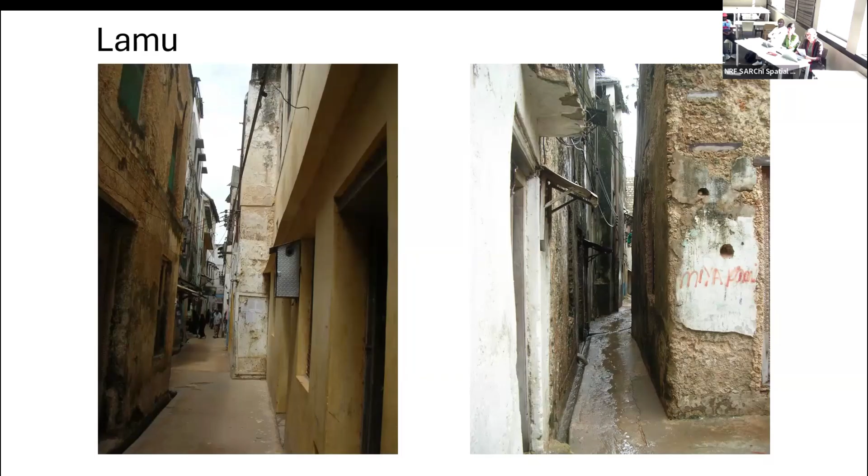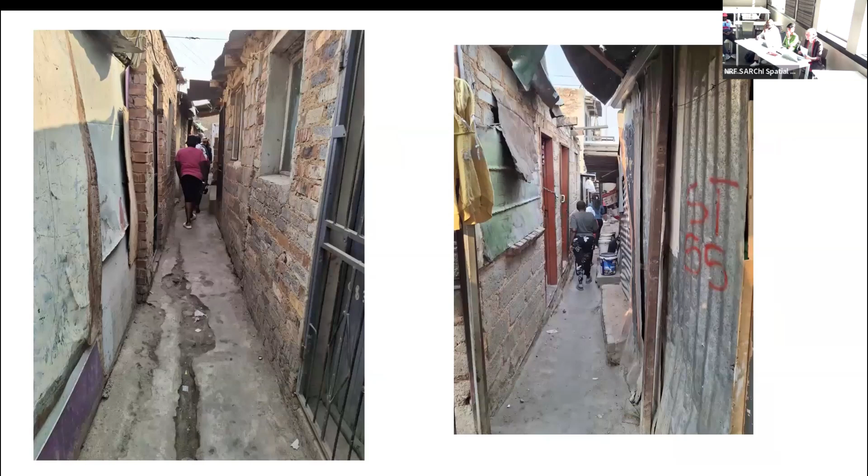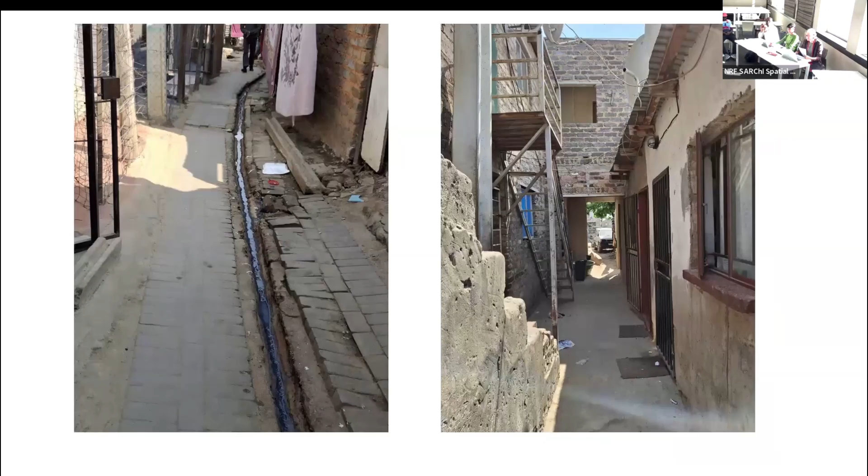Turning back to Stjwetla, I'm showing a few images of the very narrow alleyways, which to varying extent have little water gullies in them. Mostly they are paved. There have been localized ways of dealing with stormwater, which is in fact the topic of one of our master's students this year. These alleyways exist in other parts of Stjwetla too, and in the aerial photograph you'd have seen these very dense, large swathes of Stjwetla with passageways like this.

The built-up fabric of Stjwetla is very dense, but it's also diverse—there is precarious housing in Stjwetla, although it's also inhabited by people who are not just surviving, who have a modest income and invest quite innovatively in the very little space they manage to secure. Stjwetla is not socioeconomically segregated internally, but nevertheless the more marginalized people occupy the more marginal land—you'd find exactly the same pattern in a favela in Brazil, where people who arrived more recently are the more precarious ones, having to occupy steep slopes, or in Stjwetla, the areas more likely to be flooded.

But different parts of Stjwetla also evolved out of different city-making processes.

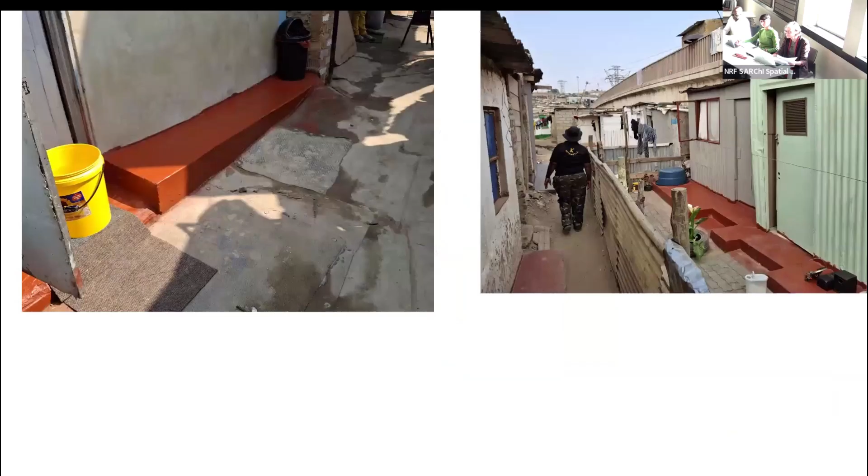There's a politeness that goes with navigating these spaces. Here we have from Lamu a feature which is a bench built onto the side of a house, and it also becomes a feature internally, in the in-between spaces between public and private. This is a feature we see very extensively across Stjwetla, almost a unifying feature across the different typologies of housing and city making.

Tin houses or corrugated iron houses would have them in front. The unifying feature is also the red polished paint sold at the market - a lot of effort gets put into keeping these little stoops beautifully polished, and they're used for a diversity of purposes.

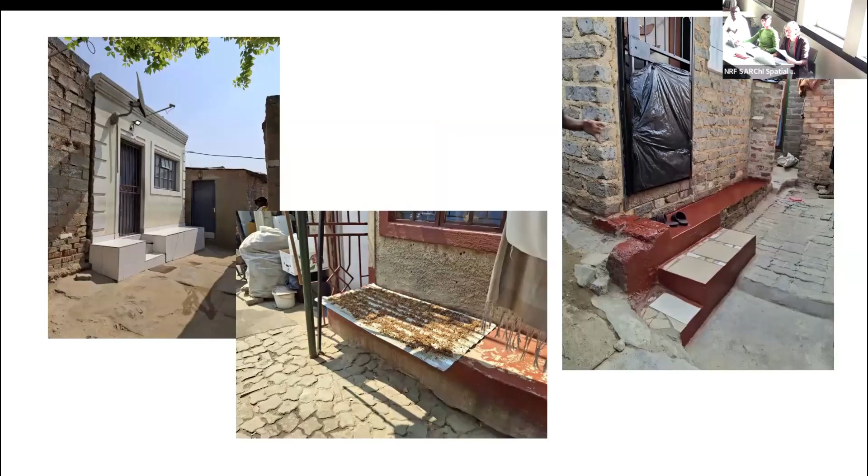There's one tiled in front of a very beautiful little house, and on the right-hand side a more precarious one, but that's where the shoes get left when you step inside, or in one case below, a sort of traditional herb being dried. Often one sees washing tubs standing on these stoops as well. They define a semi-private space.

In the temporary location area in Stjwetla, people have also appropriated these concrete structures in front of their houses and used the same color, and it becomes really a unifying feature across the entire settlement.

I'll move on to mentioning different parts of Stjwetla. Masengeni in the south is a response to infrastructure that was laid out - in fact it was electricity. There's no other infrastructure other than electricity, laid in a grid system with long straight blocks and temporary shelters, very small dimension one-room temporary shelters.

That was the pattern according to which people were allocated units, which has since transformed. There are some internal bathrooms and sewers that have been built, and others are still using the communal chemical toilets that are rolled up along the main road, and collected water.

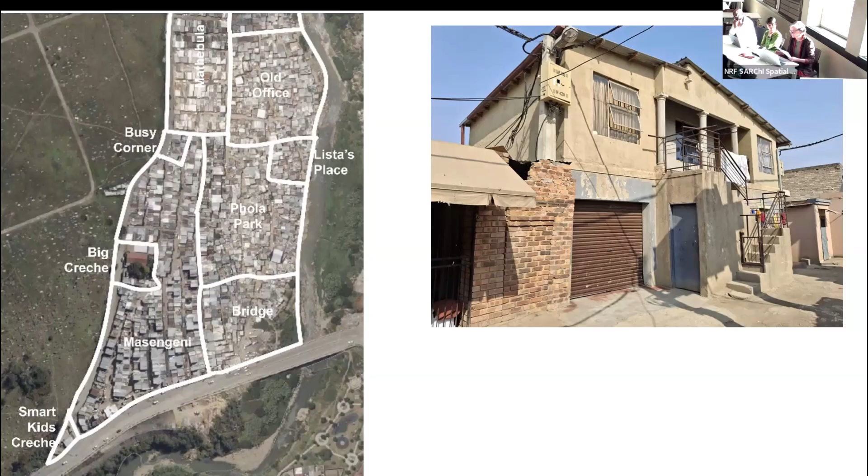So with that, I'd like to head over to Nomonde, whose research we'll hear about, which has really been building on the housing approach that's inherent in these areas. So thanks, Quentin.

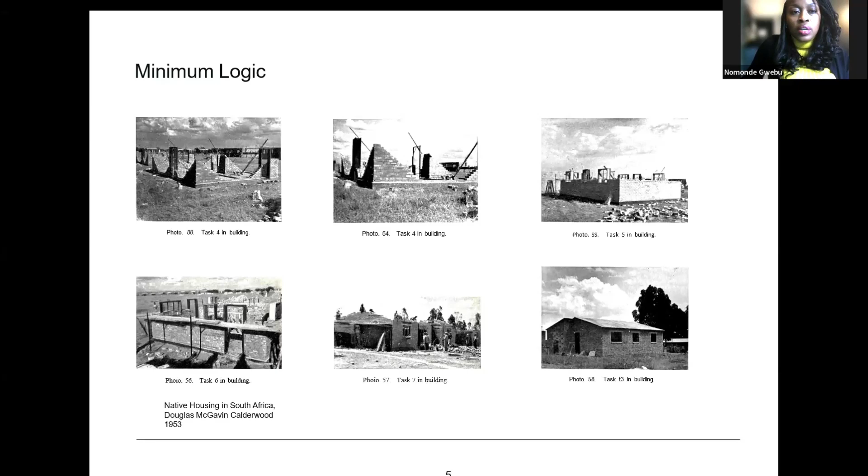On this minimum logic: the architectural design atelier methodology was actually used in 1953 by architect Douglas McGavin Calderwood, to produce what was then called the model native house.

Interestingly, the same design that was then called the model native house is what later became the RDP house, and later was renamed the BNG house, although these were under different policy eras.

So Calderwood's thesis proposed the first comprehensively documented and widely implemented low-cost housing model in South Africa. That's why it is, in a sense, the beginning of this research.

Having presented this background, the research problem can be clearly articulated: while the urban and building designs of low-cost housing remained constant throughout different policy eras, the examples photographed here, the aspirations in the policies that produced these designs actually had changing, and at some moments contradictory, aims.

For example, the apartheid government was looking to contain and control a workforce with this design. The RDP house was looking to house a newly liberated population of South Africans in dignity, but used the same design to do so. Then in the BNG policy era, the insights one can glean from a design point of view were about correcting some of the shortcomings of the RDP.

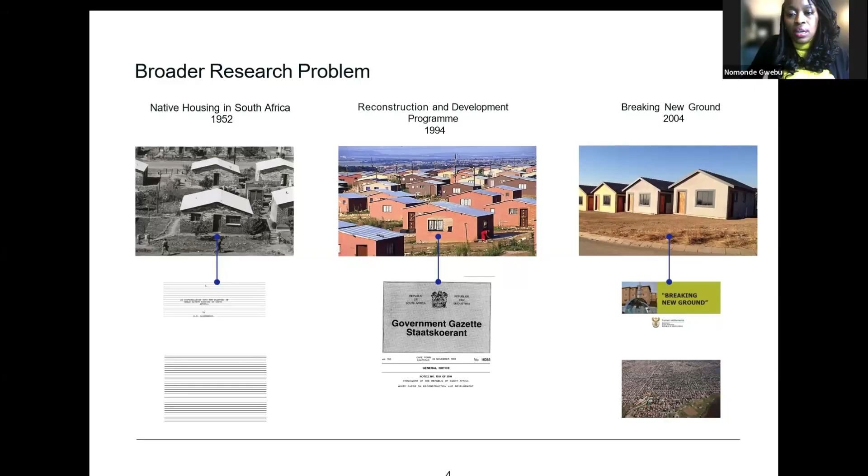So while the policies had totally different objectives, the design that was expressed as a result of those policies saw very little change. And that is the problem of the research.

The question springing out of that problem, simplified for this presentation, is why is it that the apartheid era housing models either persisted or new housing programs produced units that were inferior to earlier native housing models? In other words, how can we substantiate a design trajectory that achieves its aims and transcends the minimum logic?

I approach the question through 4 sections: the background, which is a book chapter focused on the research question, framing a background that looks at what is the influence of the 1950s model native house on contemporary low-cost housing.

Then the first case study, atelier number 1, was in Eastern Johannesburg, not in the city studio area, so I won't present that in detail.

But the second atelier case study is in Stjwetla, Evolving Architecture, Architectural Design Research towards evolving the temporary housing typology into permanent dwellings in Stjwetla.

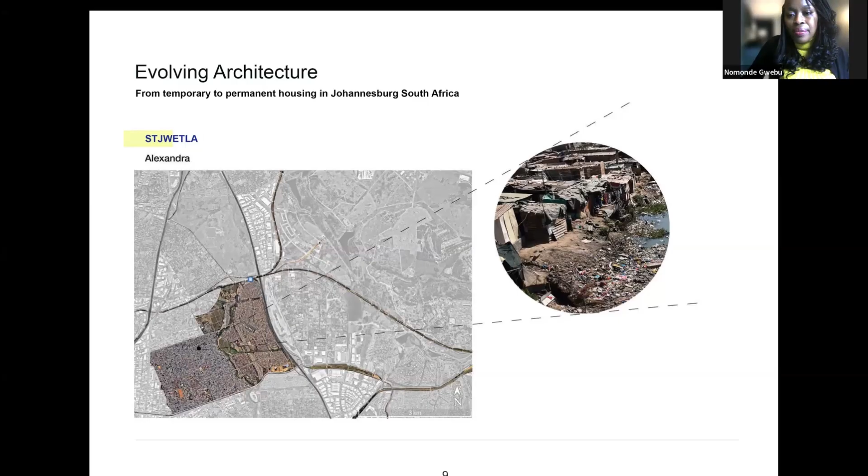This is a typical self-built home, zinc sheeting and plastic on top are materials we see in this kind of self-made typology. And then, rather controversially, there's a relatively new temporary housing typology being implemented by the government in very similar material, also zinc sheeting, materially very similar to the self-built models.

Just to give you an idea of the scale, during 2022-2023 the Housing Development Agency awarded 4 separate tenders for the delivery of 1,256 units. So it's picking up during the period of this research, which was up to 2024, it was picking up quite steadily in its implementation.

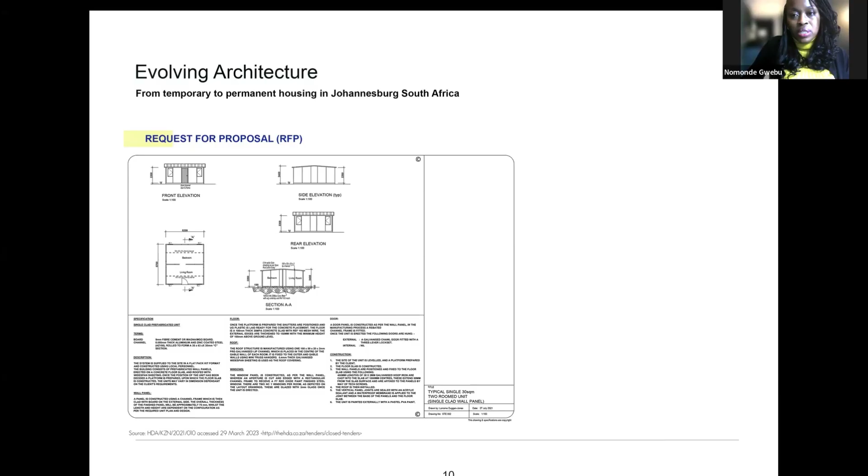I mentioned this temporary housing category because the state has delivered temporary housing in this case study to a community in Stjwetla where homes were actually burned down. That's commonly when temporary housing is delivered.

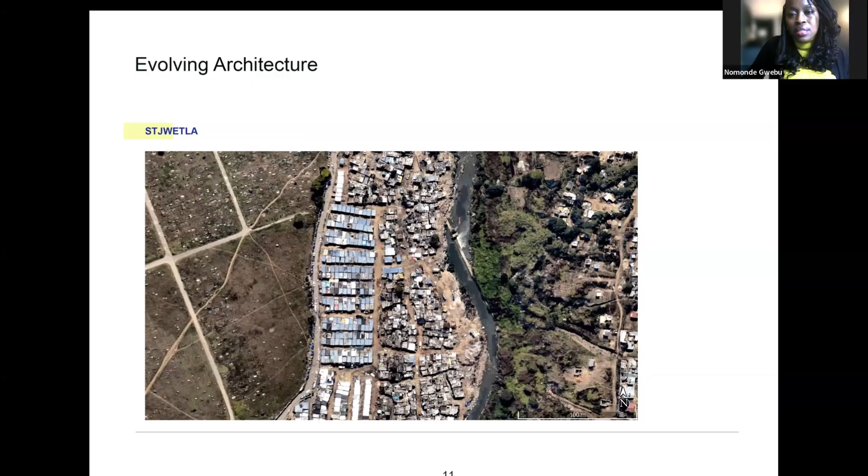This is the study area for this particular research. Another view of what was delivered. The units are back to back. This is the street formation that Marie presented. There are toilets here which are shared between the community on the right and the cemetery on the left.

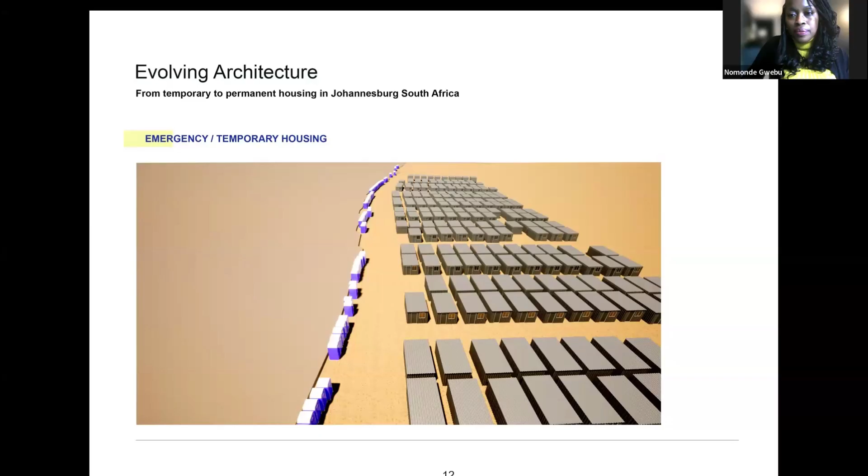This is a section through the site which reveals, in diagrammatic form, an elevation of what is delivered.

These images trace a path of how people upgrade their own dwellings. Starting on the left, the plinth that Marie presented from an architectural point of view, the waterproofing of the ground floor plane is something that's not done in the way the temporary units are delivered. They're just placed on top. So the first renovation tends to be fixing that.

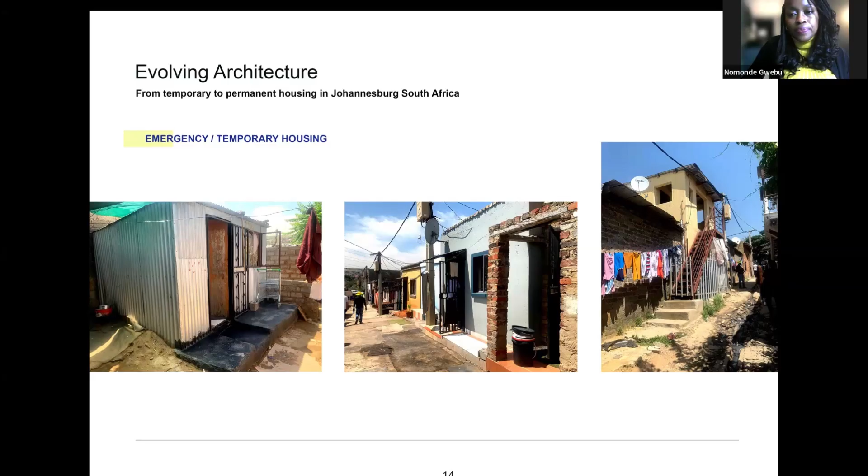Then the middle image shows further upgrades, the painting that's been spoken about before. People really beautify and take pride in their homes. The furthest renovations typically go on the right, the double story. So the research took quite a lot of time to document the typical order of things as people save up and are able to do more and more to the dwellings.

Local construction workers often salvage materials from other projects, restore them, clean them, and then resell them to this market, and then they become affordable for people to actually implement these kinds of upgrades.

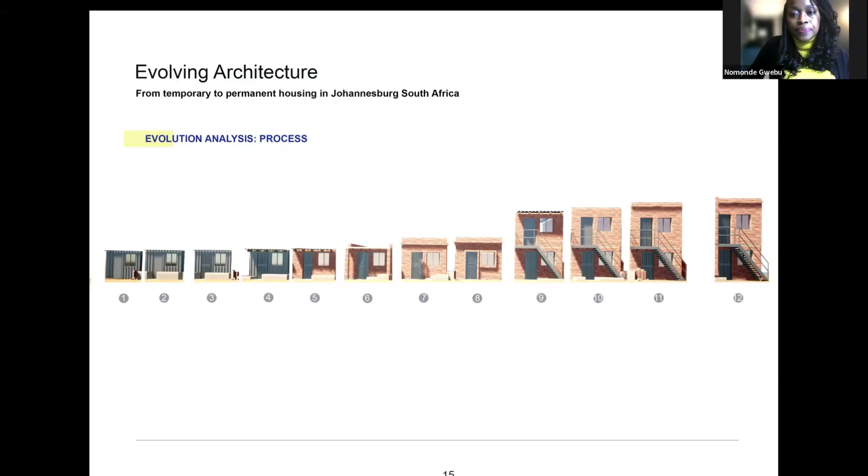And then as we saw also, but maybe in a bit more detail, this is a typical street where the various houses are in different stages of developing.

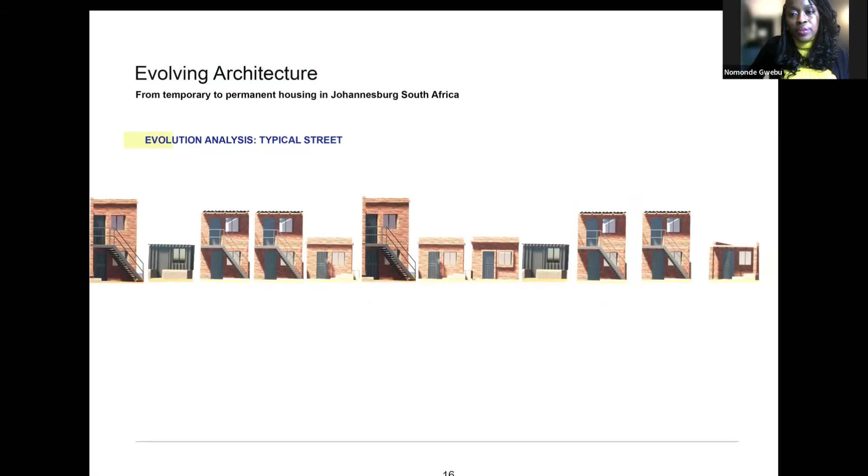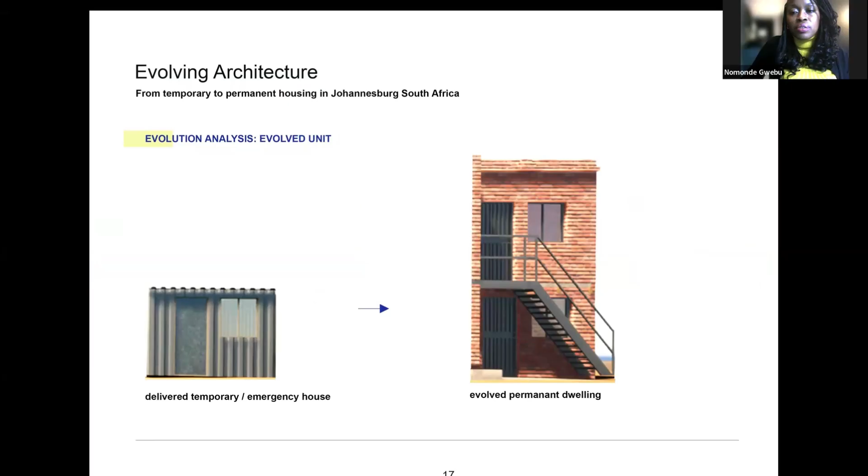Delivering a temporary house that must be demolished to make way for a long-term structure is unsustainable and impractical. So the research proposes that rather than delivering a temporary house, what could be delivered could be a portion of a permanent house that would create more of an affordance for the kinds of dwellings that we know tend to come a few stages later.

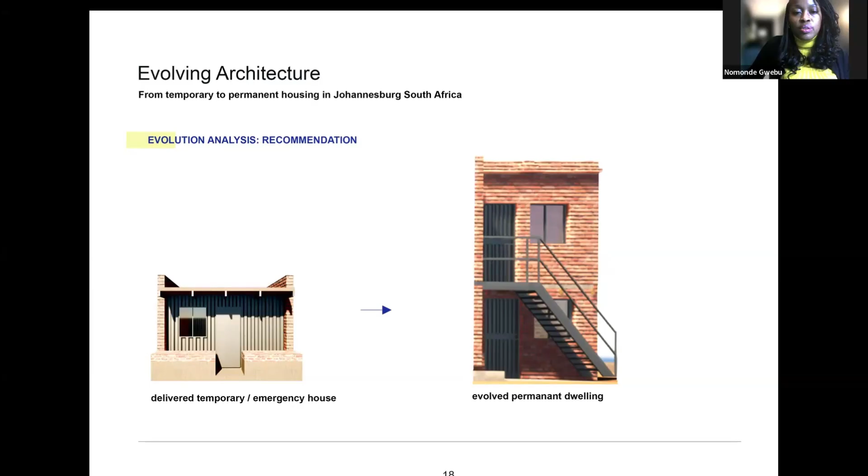The second and last case study we'll be looking at here is on the vacant, lucrative land between Stjwetla and Sandton. Sandton is one of South Africa's most expensive places, and that kind of tension isn't really an exception anymore. It's a reality we're having to deal with more and more—this idea of urban infill between contexts that have totally different social fabrics and income levels.

So this atelier draws on 37 existing low-cost housing proposals developed for case studies throughout South Africa to propose a design for this greenfield site. The case study aims to locate similarities in approaches to low-cost housing in a set of national examples in order to propose a design that would then be theoretically widely applicable.

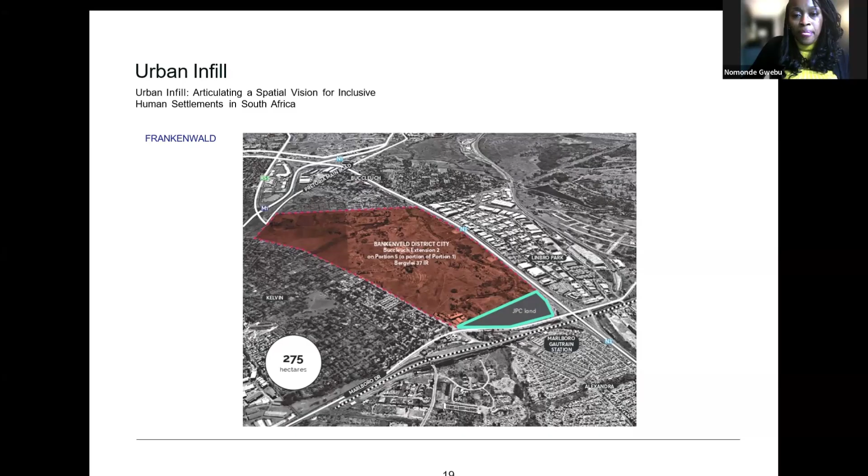So the site considered in this case study is outlined in blue. If we look at the next slide, there's a company working on developing the much larger piece of land—a developer that typically implements middle class and upper middle class dwellings. From the forms we see here, those are the sorts of dwellings they seem to be building. They claim to have thought about low costs to an extent, but the forms don't really show much variety.

So this research assumes that a middle income development is on its way, and then looks at this lower piece of land owned by the state as an opportunity for an infill project between these extremes of underdevelopment and the very developed suburbs we're beginning to see.

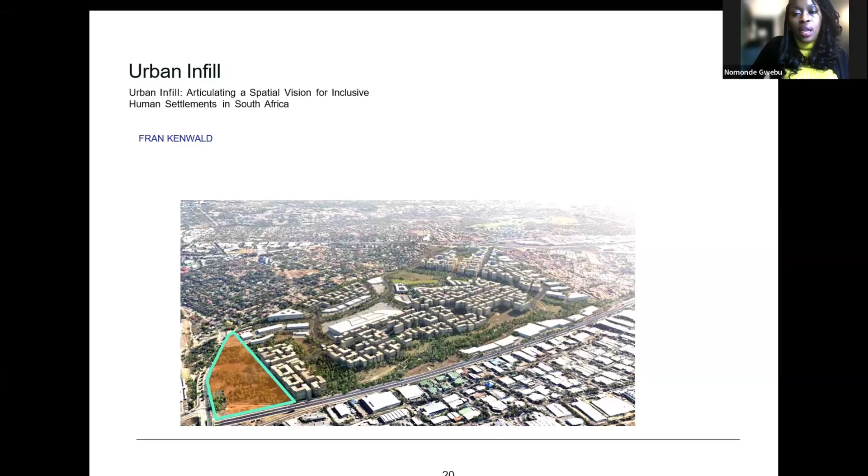So all of the Master of Architecture theses generated between 2000 and 2024 were obtained by this research and tabulated as you see here. Hamdi's model that I presented earlier was used to locate these approaches on a spectrum between approaching housing as infrastructure and approaching housing incrementally, based on what these designers recommended for the context they studied in detail.

For example, in the second column you have UCT, where there were 6 housing-as-infrastructure proposals, 1 incremental house design proposal, and 7 proposals that combined housing as infrastructure and incremental in the same project. Drawings were done to understand the essence of each proposal and make their insights accessible as design strategies to implement on the vacant site.

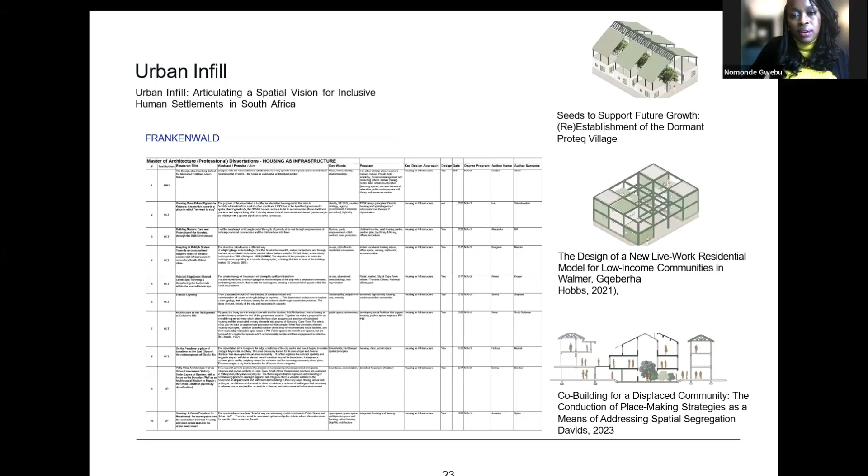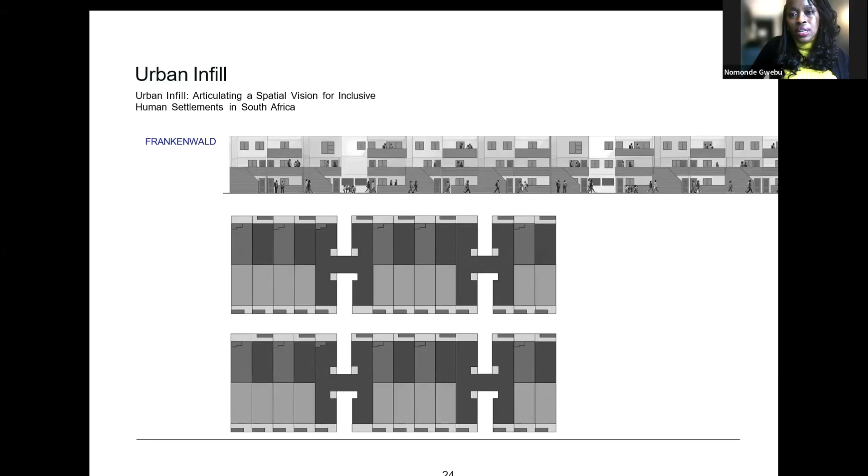From all of these studies, this kind of design emerged. There's a rhythm here of private dwellings and businesses. The streets we see in Stjwetla start to emerge in this design, and we see echoes of the character Marie was describing about Stjwetla, but designed in a way that's a little less precarious, perhaps. So variety is attained through creating a fixed palette of design resolutions that owners can still select from.

Sure, okay, time is really not on my side.

I will go to the design principles then. So the design principles that were derived from this research that I've presented, a few other examples, and a couple of other findings from the literature review revealed these principles. Whether the approach was predominantly infrastructural or predominantly incremental, these four principles were still visible in most of the recommendations and even in the proposals that the research produced.

And that is visual rhythm modularity. There are brief explanations under each one, which I don't think we have time for, but the visual monotony that results from implementing identical structures arises from the practical need that mass producers must embed efficiency through repetition in their construction processes. While the conceptual approach of building communities through totally incremental, individually designed homes finds appeal with activists and community outsiders, community members tend to value the structural reliability of formally developed infrastructure housing projects. And then to account for the counter imperative for repetition and variety, the research finds potential in a rhythmed modularity, and then visual and functional variety, the variety and the function just being expressed in the design.

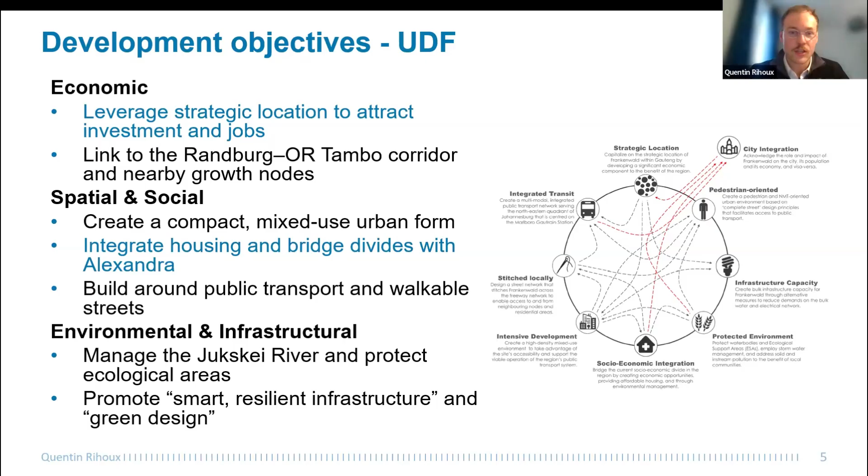The project wants to capitalize on its location. It sits right between key corridors, and planners see it really as a future business and residential node that could attract investments and jobs. But it also speaks to bridging the socioeconomic divides between the affluent northern suburbs and the nearby Alexandra Township, which means combining a large portion of bonded and commercial housing aimed at maximizing the surplus value with a small share of state-subsidized housing to reduce the risks and remain in the agenda of de-densifying Alex, the original agenda. So how was this translated into the plan?

Basically through an iterative process of translating broad development objectives into programmatic goals, and then giving these programmatic goals a form on the abstract space of the plan. It starts from a perimeter following the property boundary drawn on the map.

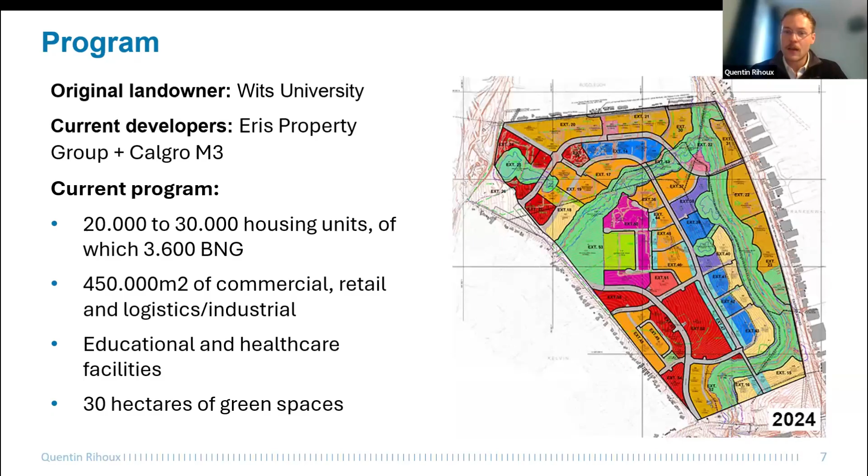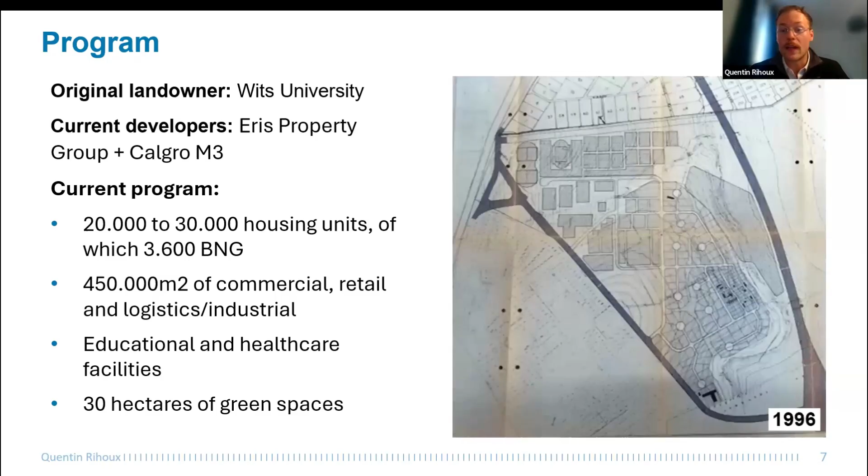Onto this base, planners layer physical and legal constraints, then sketch a street network, and the remaining land is divided into programmatic units, then into blocks where different typologies are tested. Through this process, one can extrapolate surface areas by land use, which in turn translate into potential real estate or rental income for developers and for Wits University.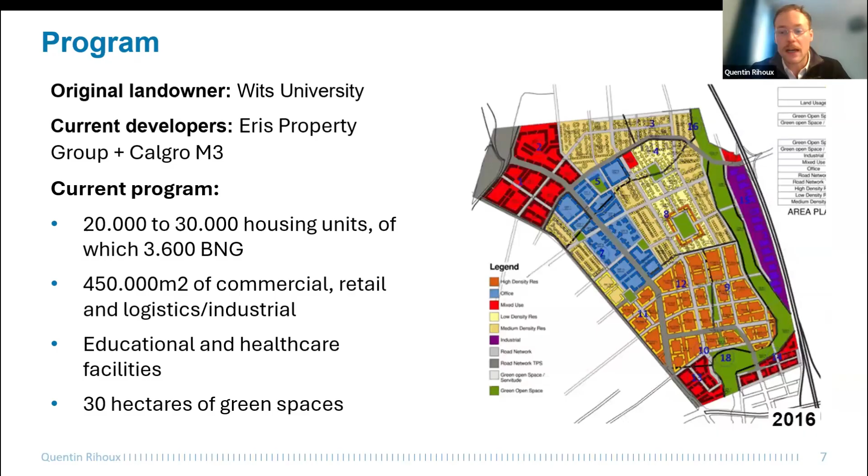Throughout the project, negotiations and power relations between the different actors continuously reshaped these objectives, programs, and plans, forcing the design process to look back and recalculate.

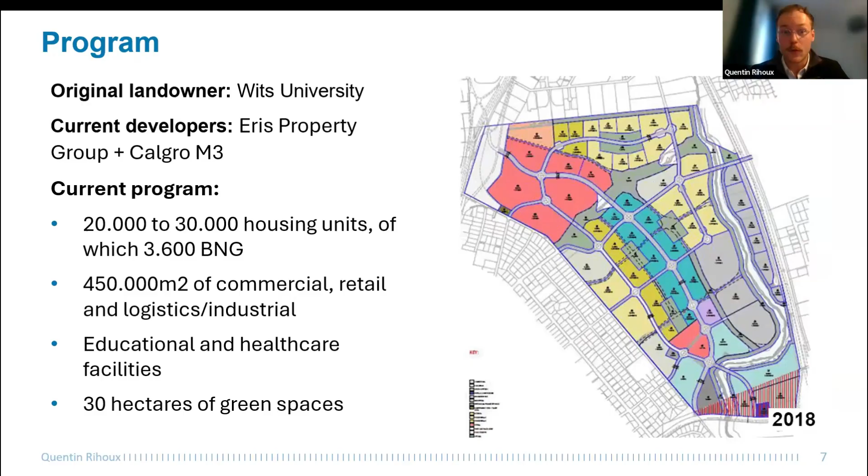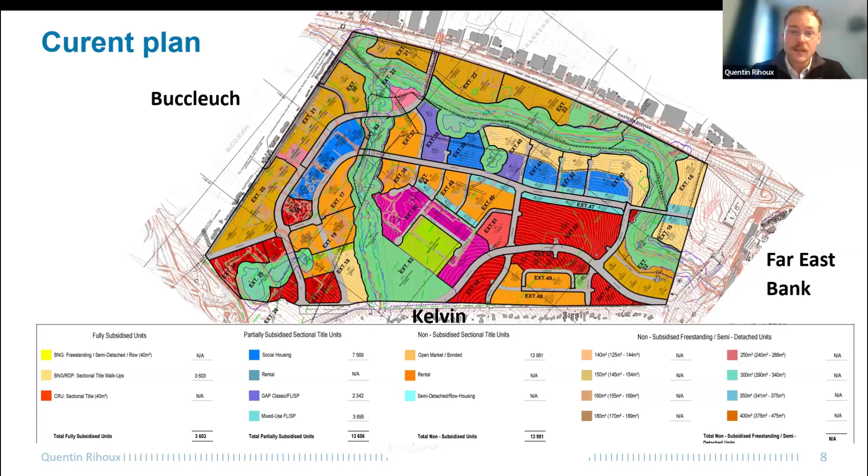Here is how these programs are now distributed on the plan. The first thing you see is a large green area around the Jukskei River. Then industrial activities in brown facing the highway and the community of Buccleuch.

Two commercial and offices hubs in red. A high line connecting the Gautrain station towards the center of the development, and a large compound of schools in magenta next to the large green areas.

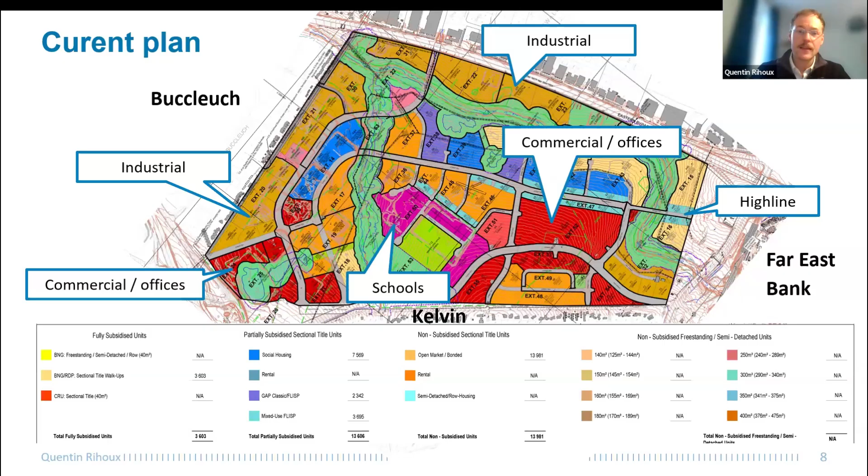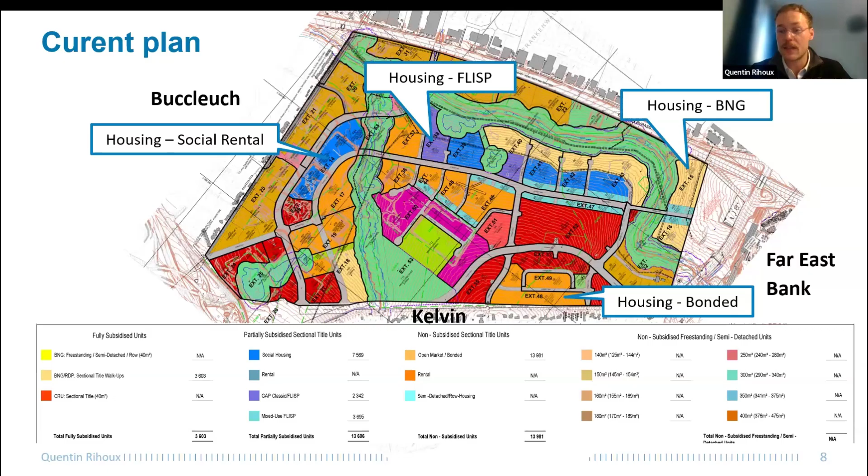In terms of housing, most of the area is dedicated to 13,000 open market bonded units in orange. In shades of blue, another 13,000 units are either social rental or FLISP, meaning bonded but at a controlled price. And finally, in beige, closer to the Far East Bank, closer to Alex and the Jukskei River, the 3,600 fully subsidized BNG units.

The idea of phase one, which has kicked off this year, is to start next to Buccleuch with industrial, commercial, and offices areas, as well as some bonded and social rental housing, because starting there requires less upfront investment in terms of infrastructure.

The intention was also to start with some BNG units near Alexandra. But this is now being delayed because the city, who owns the piece of land that Nomonde talked about next to Marlborough Drive, is delayed with their own development process.

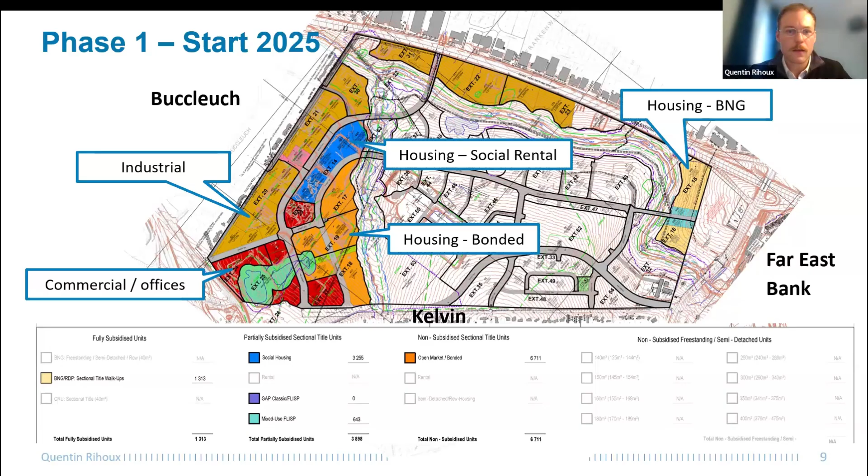To finish more concretely with the spaces this will result in, I further zoom on the plots. First to say that the chosen programs, the profitability requirement and the constraints of the site result in a very high housing density on the plots dedicated to housing, with most of the housing between 8 to 12 stories, with only one exception.

Here, facing Kelvin, a community who managed to negotiate lower density for bonded housing to protect their property value. Here you'll notice that the state subsidized housing is set to 8 stories, which is quite different to the norm, but also to what Nomonde showed.

This is due obviously to the high density needed to produce sufficient profit margins, but also due to a deal with Kelvin and Buccleuch community against what is considered not proper, meaning site-and-service and other forms of incremental and auto construction, which allow impoverished Black people to build as they want.

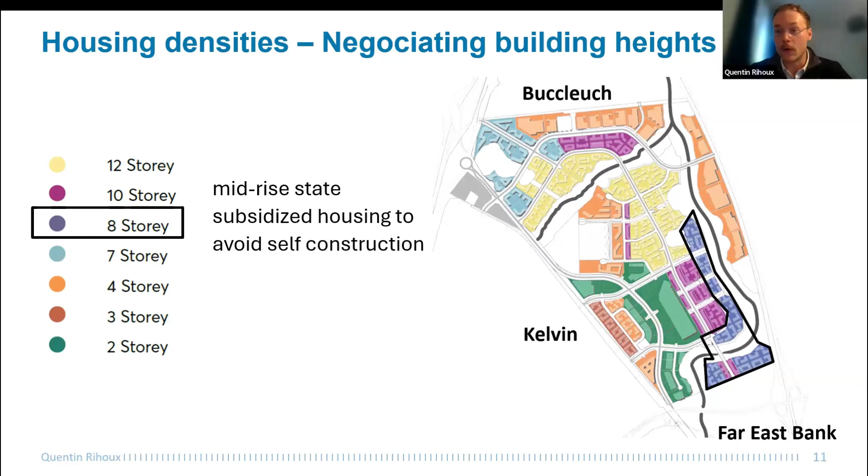Finally, each of the individual housing blocks are further divided into 4 plots with sole access from a dead-end service road. The reference model for these plots is Fleurhof, another large-scale development in Johannesburg built by the same real estate developer, Calgro M3. Each plot is planned to be gated with access controlled by a boom gate.

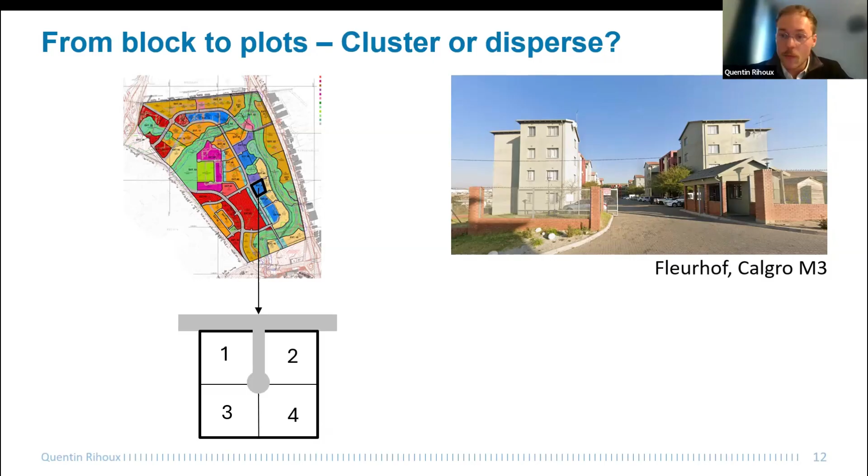The design, however, is still being negotiated. Developers and social housing companies are currently debating whether to disperse rather than cluster state subsidized housing. The stated reason is to make management easier, but this also rests on an underlying assumption that poor Black residents need to be surrounded by more affluent role models to maintain order.

I'll stop here, and I hope that the sharp contrast between the spatial imaginaries that I presented and the one that Marie and Nomonde presented will spark interesting conversation. Thank you.